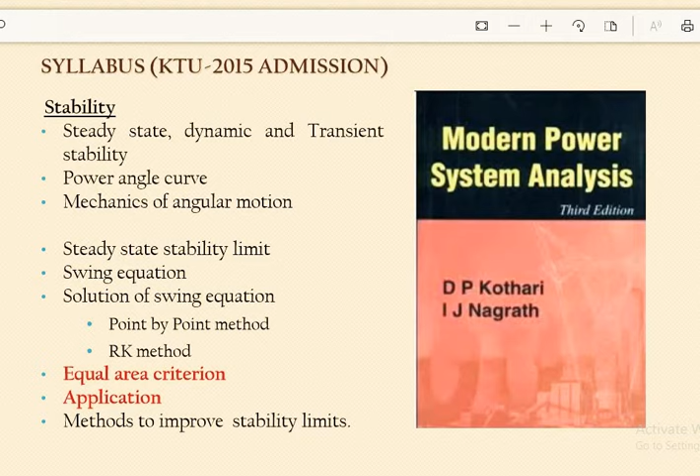Before proceeding to today's topic, let's refresh the concept of transient stability. Do you remember what is transient stability? As the name indicates, transient stability means a sudden and large disturbance occurring to a system. Now, do you remember what do you mean by stability? It is associated with the synchronous speed of the machine, our synchronous machine. Okay, and this was our swing equation. So what do you mean by swing equation? From the name itself, swing means what? Swinging of what? Swinging of rotor.

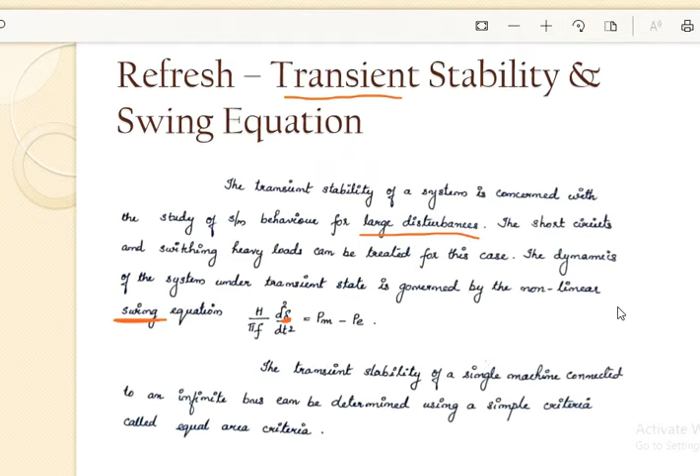Okay, that can be determined by the angle delta. What was the angle delta? Angle delta is the displacement of the rotor with respect to a synchronously rotating reference frame. Okay, so with the help of swing equation, it is actually the swinging of our rotor angle delta or the load angle delta. How is it related to the electrical power generated? Okay, or how the mechanical power and the electrical power's influence is there in this delta or in the reverse way, how this delta influences the electrical power and the mechanical power. Okay, so that is governed by this swing equation. Now, in order to find out the transient stability of a system, we require the swing equation.

Now, equal area criteria is a very important topic, very important topic, which can be asked as an essay question or its application can be asked as an essay question. Anyways, the concept of the equal area criterion should be very clear so that any type of questions in this particular area can be tackled easily.

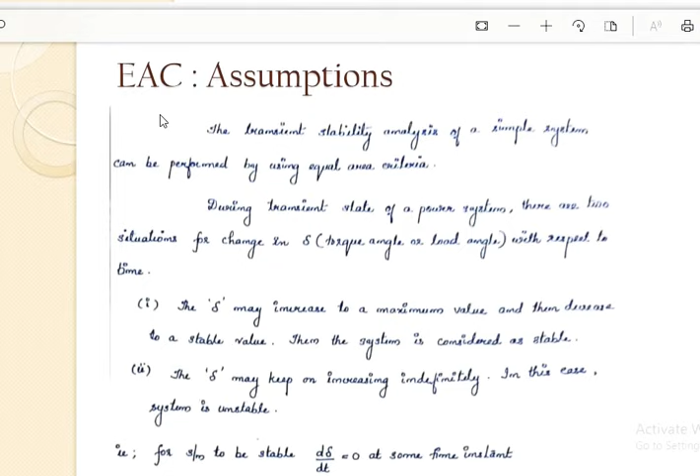Now, there are some assumptions. EAC here actually means equal area criterion. Some assumptions are there before proceeding. So first of all, again reminding you of transient stability: transient stability means if a system is capable of coming back to its initial state after a sudden or large disturbance, then you can say that particular system is transiently stable. Okay, and we will be analyzing whether a particular system is transiently stable or transiently unstable with the help of this criteria, that is equal area criteria. So if a particular system satisfies the equal area criteria, you can say that the system is transiently stable.

So in that case we are putting forward some assumptions here, and that is, again, what is delta? Delta is torque angle or the load angle. Okay, our first assumption is the delta may increase to a maximum value, then decrease to a stable value; we'll say that system is stable. What do you mean by delta? Delta is a deviation or displacement of the rotor with respect to a rotating reference frame, right? So if this delta varies and then decreases to a stable state, we can say our system is stable. The second assumption is when delta is increasing indefinitely. Delta means the displacement from synchronous. Okay, so when delta is increasing indefinitely, that displacement is going on increasing, or your rotor is running away from synchronous speed. That is the meaning. Okay, so in that case you can say that your system is unstable.

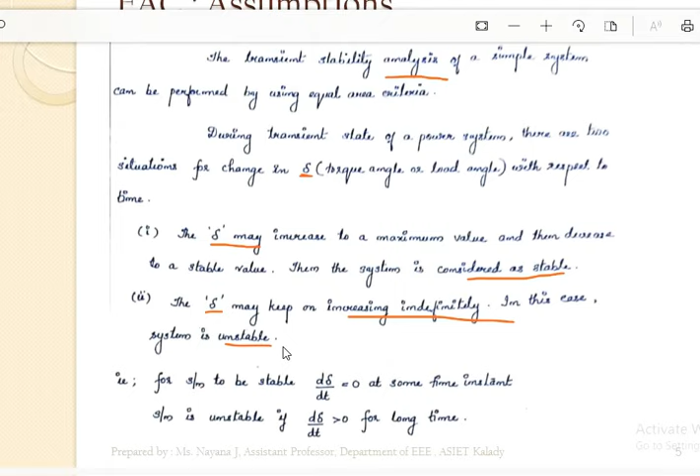These are the two assumptions put forward for equal area criteria. Under this case, I can write: for a system to be stable, your delta should not change, isn't it? So you can say that d delta by dt should be equal to 0. Your delta should be constant, your delta should not vary. Okay, so for a system to be stable, the change in delta with respect to time should be equal to 0, or there is no displacement with respect to time. And it is unstable when the change in delta with respect to time is increasing, or it is positive, greater than 0. If the change in delta is greater than 0, it means delta is continuously increasing. In such case, your system is unstable. These are the two main assumptions required for deriving our equal area criteria.

I hope these two assumptions are clear to you. The first thing is, a system can be stable when there is no change in delta, or d delta by dt is equal to 0. A system is unstable if delta continuously increases, or d delta by dt is greater than 0.

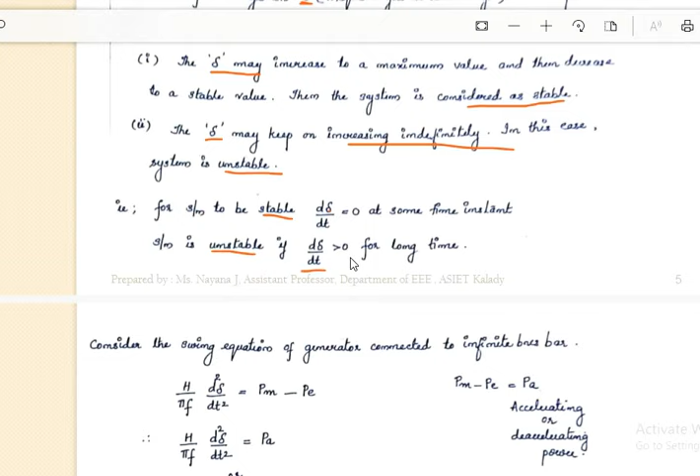Now, with the help of the swing equation, what was our swing equation? H by pi f into d square delta by dt square is equal to Pa, or H by pi f into d square delta by dt square is equal to Pm minus Pe. What is this Pm minus Pe? It is nothing but Pa, the accelerating power or deaccelerating power.

What is Pm? Pm is the mechanical power input. What is Pe? It is the electrical power output of the generator. When mechanical power is greater than electrical power, there will be accelerating power. When electrical power is greater than mechanical power, the power will be deaccelerating. And when mechanical power equals electrical power, we can say the system is stable.

These things we have discussed in the previous lectures, right? So this was our swing equation: H by pi f into d square delta by dt square is equal to Pa, where H is the inertia constant, f is the frequency, delta is the load angle or torque angle, and Pa is the accelerating power, which equals Pm minus Pe.

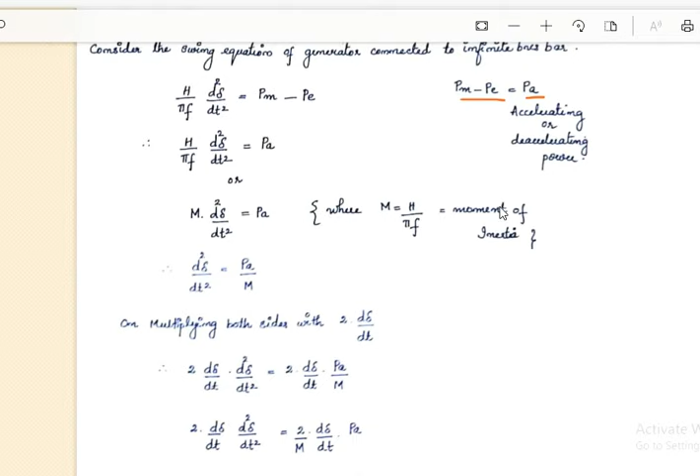Now we can reframe it as m into d square delta by dt square is equal to Pa, where m is the moment of inertia, equal to H by pi f, as we have seen. From this, I can write d square delta by dt square equals Pa over m, moving m to the other side.

Now I am going to multiply both sides by 2 into d delta by dt. So multiplying these two sides, it becomes 2 into d delta by dt into d square delta by dt square is equal to 2 into d delta by dt into Pa by m.

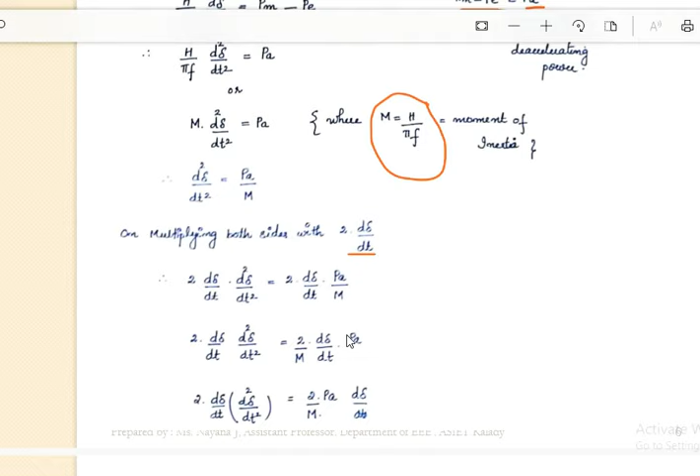Again rearranging this: 2 into d delta by dt into d square delta by dt square is equal to 2 by m into d delta by dt into Pa.

Now what I am going to do is integrate both sides with respect to d delta. So 2 times the integral of d square delta by dt square into d delta is equal to 2 by m Pa d delta. Here the dt would get cancelled, since there was one dt in numerator and one in the denominator, giving us the final expression.

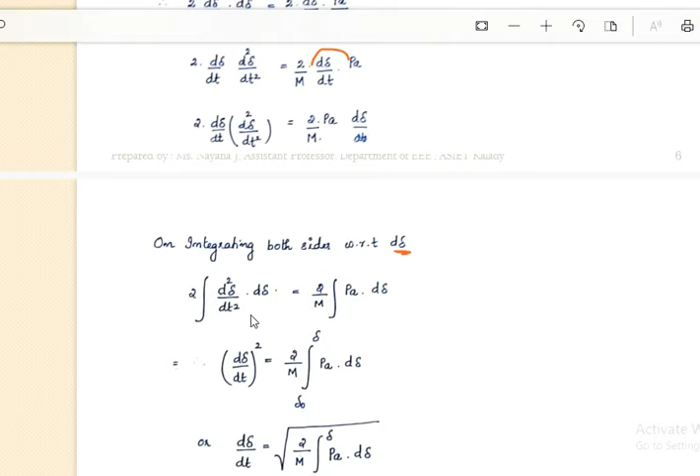So it is now with respect to d delta that we are integrating. What is the integral of d delta by dt the whole square? That is the integral of d square delta by dt square, which equals 2 by m times the integral of Pa d delta.

Now what can be the value of delta? We can apply limits, and the value of delta can range from an initial value delta 0 to a final value delta. So rearranging, d delta by dt the whole square is equal to this, so d delta by dt equals root of 2 by m times the integral from delta 0 to delta of Pa into d delta.

Now for the system to be stable, what should be the condition? d delta by dt should be equal to zero. That means either d delta by dt equals zero, or root of 2 by m times the integral from delta 0 to delta of Pa into d delta should be equal to zero. But can 2 by m be equal to zero? No. So the integral from delta 0 to delta of Pa d delta must be equal to zero.

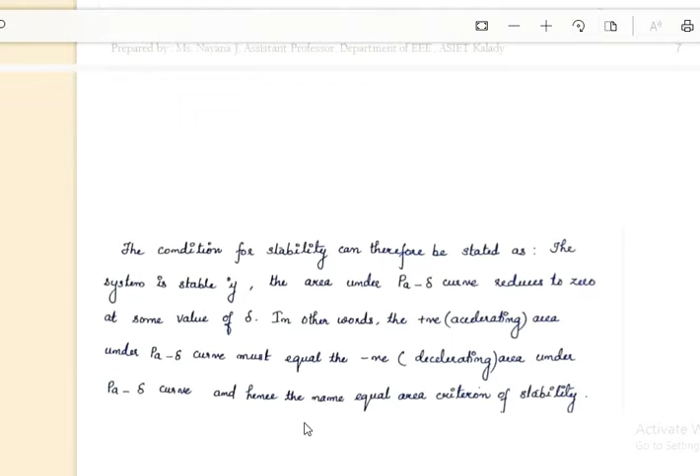Now what is this Pa? Pa means Pm minus Pe, and that quantity's integral equals zero. So from that we can say, what do you mean by the integral of something?

Integral of something means what? It is nothing but area, isn't it? So the area of the accelerating power is equal to 0. That is the meaning. Or I can say that area of mechanical power is equal to area of electrical power.

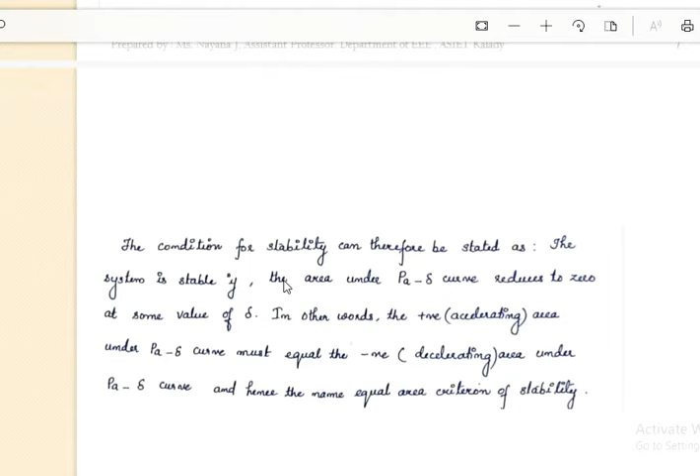So you can state that the condition for stability can now be stated as: the system is stable if the area under the P-delta curve reduces to 0. In other words, the accelerating area under the P-delta curve must be equal to the deaccelerating area under the P-delta curve, and hence the name equal area criteria.

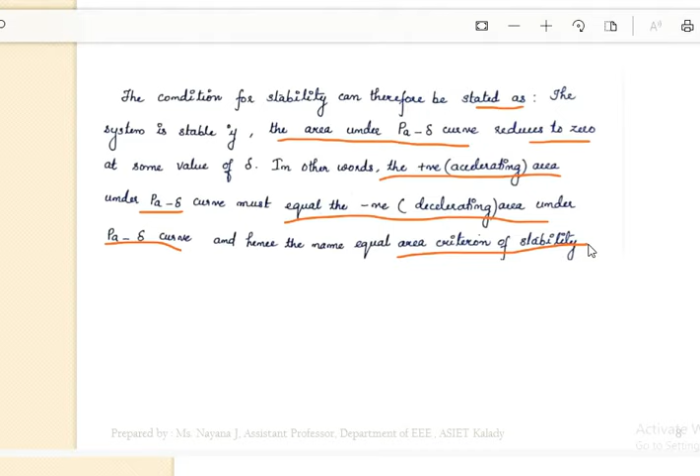So what did we derive actually? We have derived the condition for the system to be stable: d delta by dt should be equal to 0. For d delta by dt to be equal to 0, this is the condition you obtained. What does this condition indicate? Integral of something is equal to 0, that means integral of something means some area. What area? The area of the graph between P and delta.

Do you remember any graph between P and delta? What is this graph? This axis is P and this axis is delta. What is this curve? This curve is actually your power angle curve, right? This is electrical power P. This is our power angle curve.

In this curve, what all areas should be equal to 0? The accelerating area should be equal to 0. So in this curve some areas are there. Let this be one area and let this be another area. And what is this area? This area corresponds to PM. If this area corresponds to PM and if this area corresponds to PE, and if these two areas are equal, you can say that your system is stable.

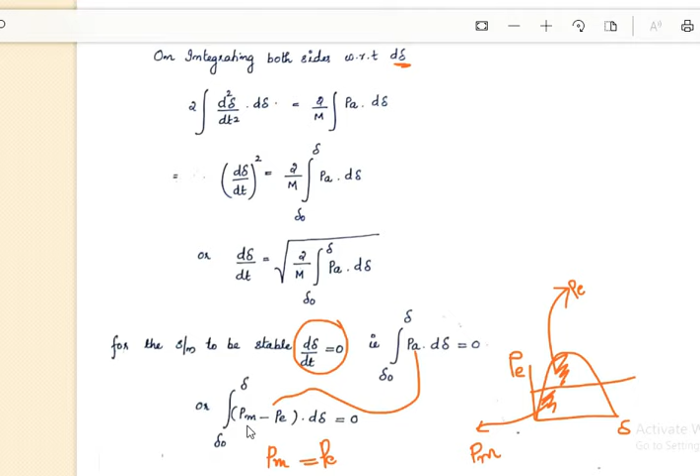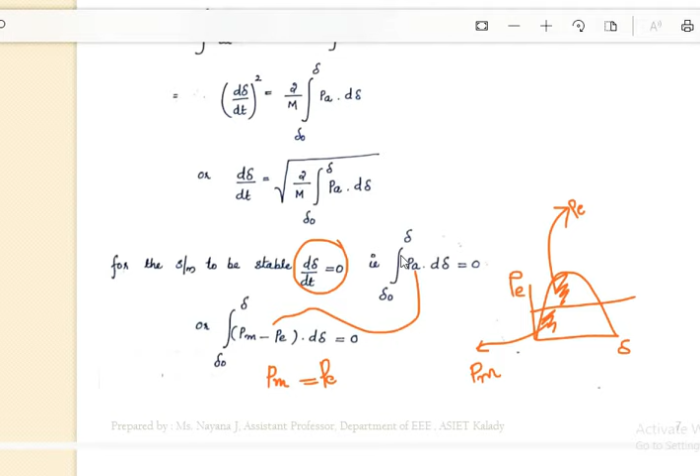What do you mean by PM minus PE is equal to 0? It simply means your PM area is equal to the PE area over the delta curve, isn't it? So this indicates that for a system to be stable, the accelerating power should be equal to the deaccelerating power, or you can say the total net power is equal to 0. If this is attained, you can say that your system is transiently stable.

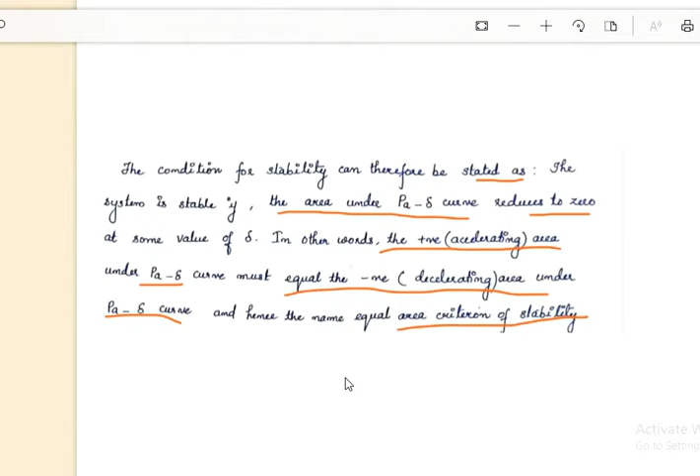Now this idea will be much more clear by looking into the applications, so we'll see which are the two areas and everything like that. So we can say that the condition for stability, by equal area criteria, is that the area under the P-delta curve - remember, the P-delta curve is our power angle curve - should reduce to 0.

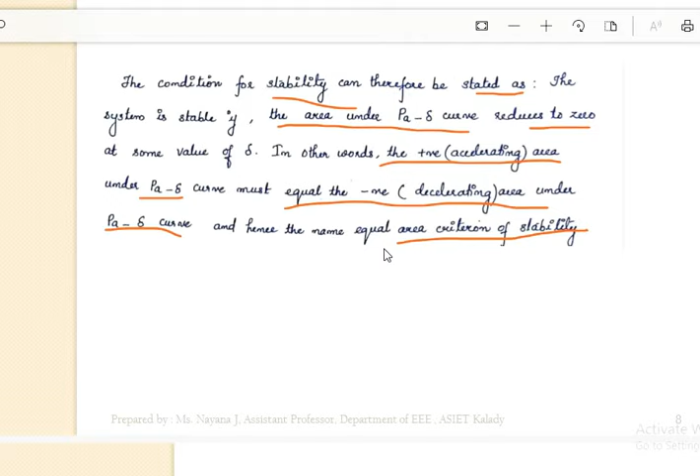Or we can say that the accelerating area of the P-delta curve must be equal to the deaccelerating area of the P-delta curve, and hence we call this criterion by the name equal area criteria. Am I clear? This equal area criteria derivation is very important. Now this concept of equal area criteria will be much more clear to you if we discuss the applications.

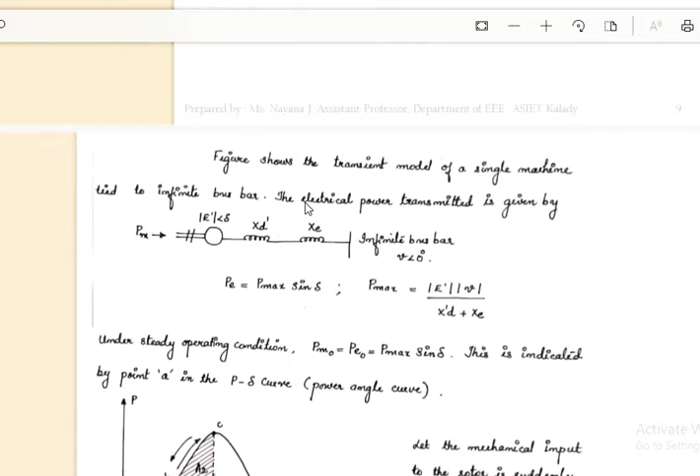Now we will see one application where we consider a sudden change in mechanical input. Now we will see what actually it is. So here consider a system is shown here: this is our generator, this is the transmission line, and this is the receiving end voltage. So if this is the sending end voltage E and the receiving end voltage is V, and the transmission line reactance is XD dash and XE, you can say what is this equation?

P is equal to P max sine delta. This is our power angle equation, right? P is equal to P max sine delta. And what is this P max? P max is nothing but sending end voltage into receiving end voltage divided by total reactance.

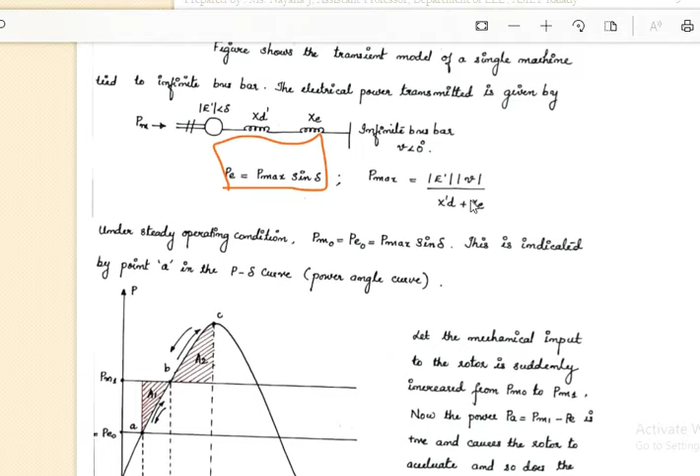Okay, now let's draw the curve. Here, this is the power angle curve, and this is the curve that we have drawn here. Now just concentrate on this curve actually. Now under steady state operating condition, what is the case? Steady state operating condition we have assumed it like, right? For steady state operating condition, your mechanical power should be equal to electrical power.

Let the initial mechanical power be Pm0, which is equal to your electrical power Pe0 if it is a steady state condition. And what is Pe0? It would be equal to P max sine delta, or rather I can say P max sine delta 0, where delta 0 is the initial load angle. So I can say that this is a power angle curve that I have drawn, and here I have written mechanical power. What is the mechanical power? Mechanical power is nothing but our steam input, right? It depends upon the steam input.

If the steam input is constant, the speed of your turbine is also constant, or I can say the mechanical power is also constant. This line indicates the mechanical power, the initial mechanical power. It's a constant value, and under steady state condition, this mechanical power is equal to the electrical power.

Let's see this point A. This was your power angle curve, and this curve represents the electrical power. So the electrical power here is the electrical power under the initial condition, because at this point the mechanical power and electrical power are the same - this common point. The delta corresponding to that is delta 0, our initial load angle. Corresponding to that delta 0, this is the electrical power generated, which equals the mechanical power because it is under stable condition - meaning the machine is rotating at a speed equal to synchronous speed, marked as omega s.

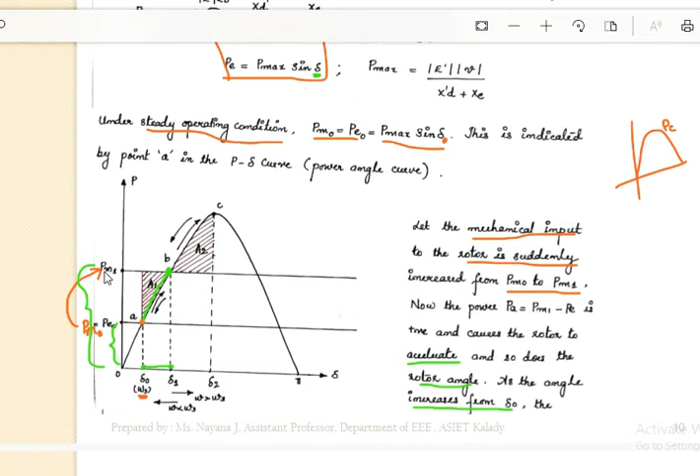At this point, the new electrical power is equal to the mechanical power. Whenever the electrical power becomes equal to the mechanical power, the machine is under stable condition. At delta 1, mechanical power equals electrical power, or the accelerating power is zero, a stable state is reached. So the angle is supposed to be stable here, but what happens? The rotor angle continues to increase, because the rotor was accelerating.

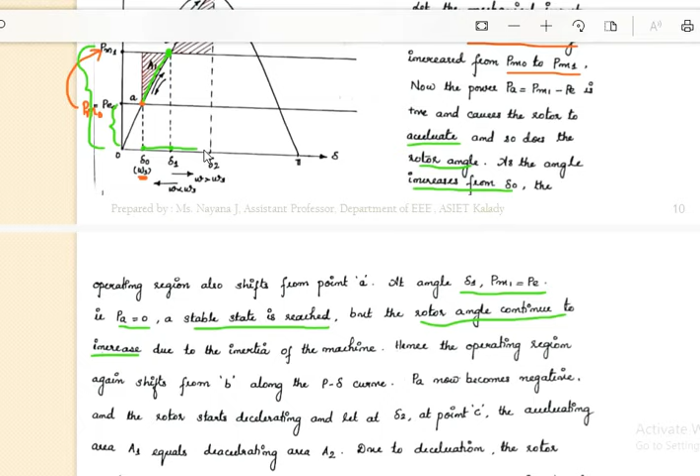Can this machine suddenly stop at this point? No, the rotor angle continued to increase because of the inertia of the machine. The machine wants to stop here, but it will not stop because of inertia, so the rotor angle will continue to increase in this direction. When the rotor angle increases in this direction, what happens to the electrical power? It also again increases like this.

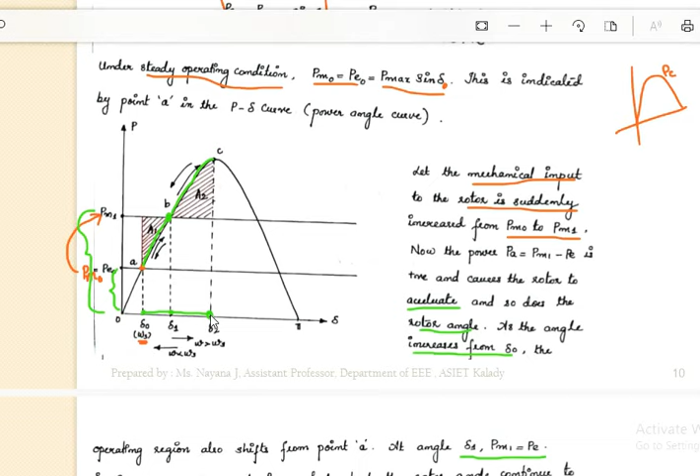Okay, now assume another point, it has reached at another point. Delta 2. Assume another point delta 2 here. At this point, how is your electrical power? I can say this much is your electrical power.

But what is the value of your mechanical power? Mechanical power is constant, right? This much is your mechanical power. So this much was your electrical power and this much is your mechanical power. So what happens? Your mechanical power is less compared to your electrical power.

What will happen to the net power? Net power is negative, right? When the net power is negative, what will happen to your rotor? Rotor will decelerate or deaccelerate, isn't it?

When the rotor deaccelerates, what happens? Load angle also decreases. So load angle reached this point and now the load angle continues to decrease in this direction. When your load angle decreases in this direction, what will happen to your electrical power? Electrical power also decreases in this direction.

Am I clear? In this direction, but again it reached this point. At this point, what happens? Your electrical power and mechanical power are same, but your rotor continues to decelerate.

Why? Because of the inertia. So what happens? The load angle continues to decrease from delta 1 towards this point. Correspondingly, electrical power also continues to decrease like this.

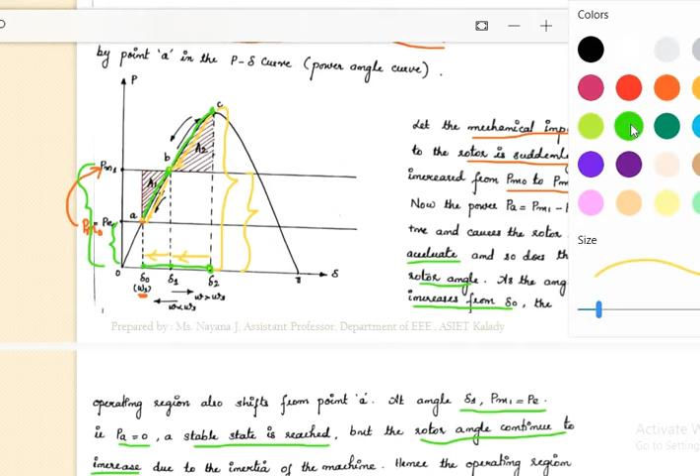Okay, again, once it reaches here, what will happen? This is your electrical power and this was your mechanical power. Your mechanical power is high compared to your electrical power. What will happen now? The machine will accelerate, that means in this direction. When the rotor angle increases in this direction, electrical power also increases in this direction, isn't it?

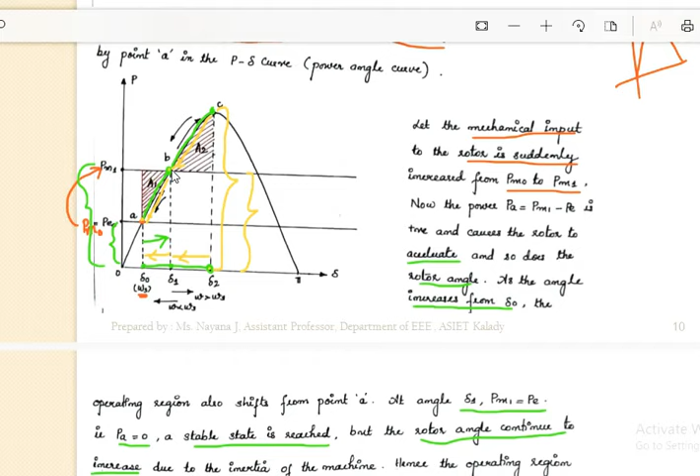So in this way, your machine's operating point will change from A to C. Again it reaches A, C. Finally, after this swinging, the machine will swing between the points A and C, and finally it reaches a steady point B where your electrical power is equal to mechanical power. Am I clear? Is this concept clear to you?

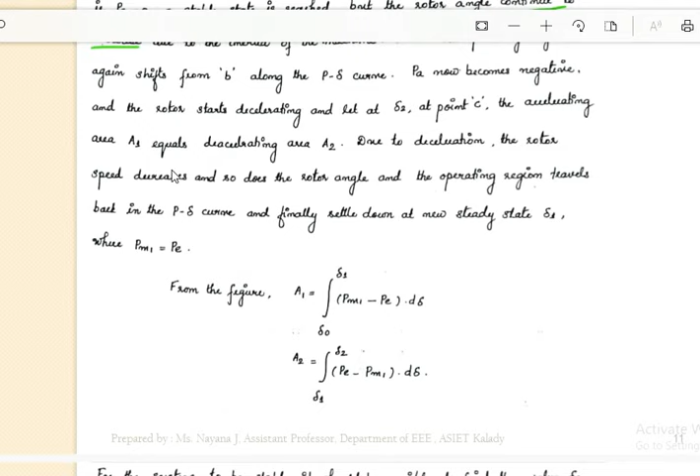So now we are going to apply our equal area criteria here. Okay, from the figure, what is the first area? We are considering the accelerating area and the deaccelerating area. Accelerating area means mechanical power higher compared to the electrical power. Now we will find out what is that area.

Can you see? Mechanical power. Okay, this area, between mechanical power and electrical power. This curve is actually corresponding to electrical power, whereas the straight line corresponds to mechanical power. So what is the area? Area Pm minus Pe, between which all limits? Delta 0 to delta 1. So between delta 0 to delta 1, what is the area? Pm minus Pe. This much, right? This is the first area, the accelerating area.

Now from delta 1 to delta 2, which is higher? Electrical power is higher compared to the mechanical power, isn't it? So from delta 1 to delta 2, which is the area? Pe minus Pm. Okay, because electrical power is higher compared to mechanical power. So this is your second area or deaccelerating area.

But from delta 0 to delta 1, your mechanical power was higher compared to your electrical power. So this is the accelerating area. So you got two areas. A1 is the accelerating area and A2 is the deaccelerating area. Now, according to equal area criteria, for this system to be transiently stable, the two areas, that is accelerating area and the deaccelerating area, should be equal.

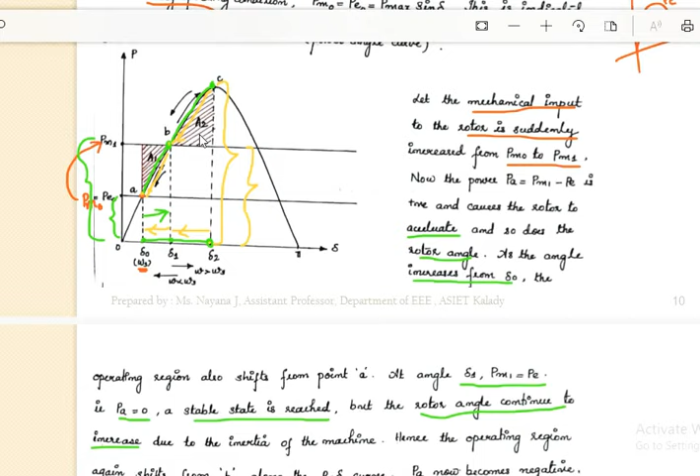Now let's see the analysis. From this figure here, this is what we have discussed. So A1 area, first area is from delta 0 to delta 1, Pm1 minus Pe into d delta. And the second area is from delta 1 to delta 2 where electrical power was greater, right? So Pe minus Pm1 into d delta.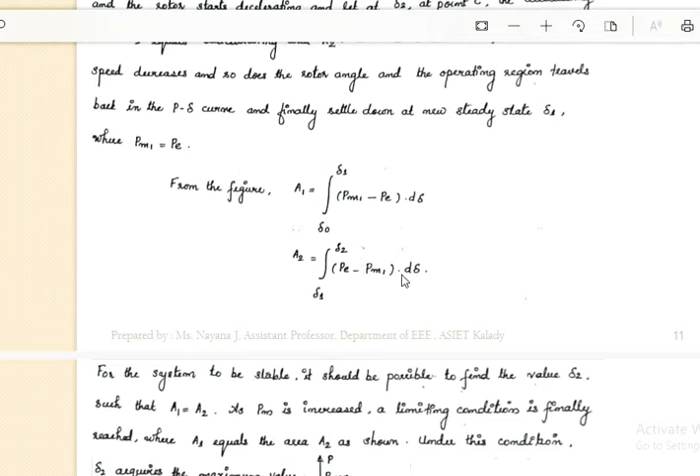For the system to be stable, what should be the condition? For the system to be stable, the two areas should be equal. Okay, or at least your A2 should be greater than A1. This is a condition.

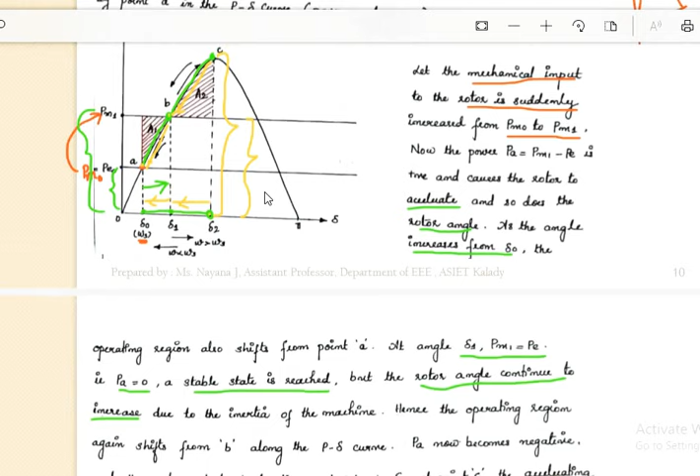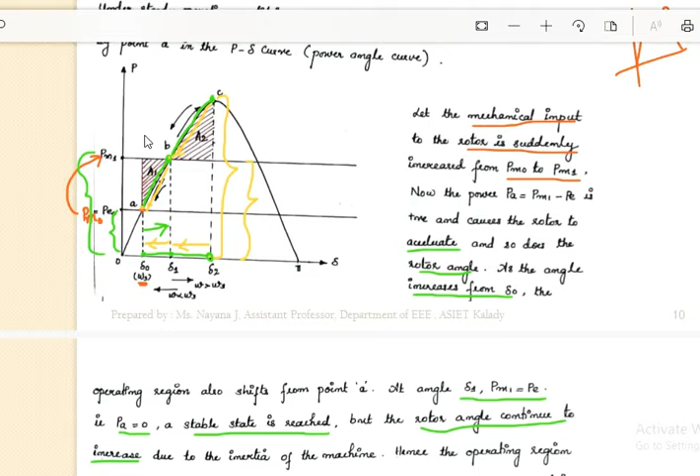Okay, A1 is equal to A2. Now let's see this, assuming that your A1 is equal to A2, no issue. The main case is that your accelerating area should be less than your deaccelerating area. Whenever your accelerating area becomes greater than the deaccelerating area, the machine loses its synchronism.

Now here we are assuming another case. Pm is further increased. This is one case, another case, right? As Pm is increased, this is the maximum value of delta 2. Beyond which I cannot have any delta, isn't it? This is delta 1, this is delta 2.

Now this is a condition. Under this condition, delta 2 is a maximum value. This is a maximum value. If further I cannot increase the delta so as to make these two areas equal. Okay, so that's the case here.

Now if there's any further increase in P, if I increase the mechanical power like this much, this is your new mechanical power. So that means your area would be somewhat this much, right? This much would have been your first area.

And your second area would be only this much. So from here itself you can see that this area becomes greater than this area. So your system will become unstable. So that means this will be your delta 2. Right? So beyond which I cannot increase.

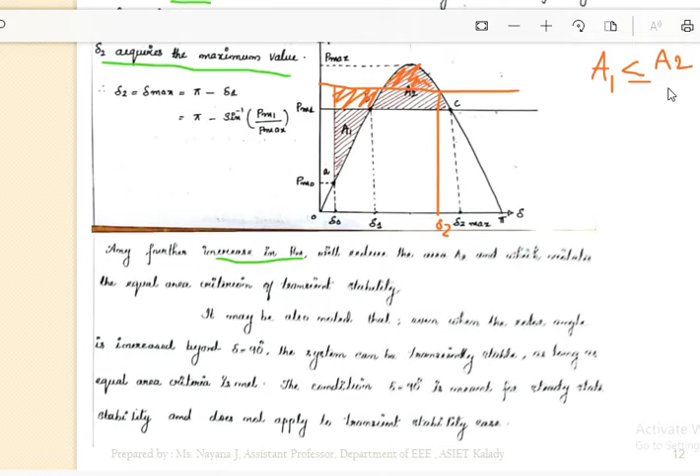That is the maximum limiting condition. Or at least your accelerating area should be always less than or equal to your deaccelerating area. This is the condition. So by keeping this criterion, you can say that a system can be transiently stable. So coming back to this particular case, here you can say that this is a maximum value of delta because there is no value of delta available here.

There is no value of delta available here. So this is the maximum possible value of angle delta. So you can say that your delta 2, or the maximum value of delta, is equal to pi minus delta 1. It is same as pi minus delta 1, right?

So what is this much angle? This much angle will be equal to the entire thing pi minus this. This is simply but delta 1. So pi minus delta 1. So what is this delta 1 actually? What is this delta 1? What is this delta 1?

That is nothing but PM1, right? PM1 is equal to Pmax sine delta 1, isn't it? That is the equation. PM1 is equal to Pmax sine delta 1. From this I can write delta 1 is equal to sine inverse of PM1 by Pmax.

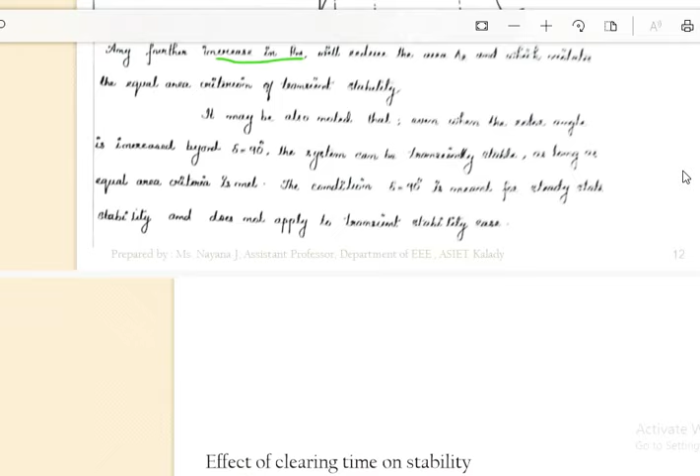Okay, so in this way you can find out the maximum value of delta. So the main application of this equal area criteria is to find out two areas, that is accelerating and deaccelerating area, and whenever you see that your accelerating area is less than or equal to your deaccelerating area, your system is transiently stable. So that was the case when you increase the mechanical power.

Now we will see another case. Here again we consider the sending end voltage and everything are the same. The same assumption is there: initial condition mechanical power is equal to Pm and initial electrical power let it be Pe0. The angle corresponding to that is delta 0. So this is our power angle curve and this is our mechanical power.

So you can say that initially your machine is operating at this operating point A, and corresponding to that your load angle or torque angle is delta 0. So harmlessly your machine was operating under the stable condition, or otherwise I can say at synchronous speed. So suddenly what happens is that a three-phase fault occurs. It was at this point a three-phase fault occurs, and what happened when a fault occurs like this, electrical power from the machine here, the electrical power becomes equal to 0.

So when electrical power reaches 0, what happens? This was the actual electrical power. Now when the electrical power reaches 0, that means from this point your electrical power decreased and reaches 0.

Okay, so this was the first operating condition. Suddenly a fault occurs, your electrical power drops from Pe to 0. That means this operating region. So now what happens? Now your electrical power is 0, whereas this much is your mechanical power.

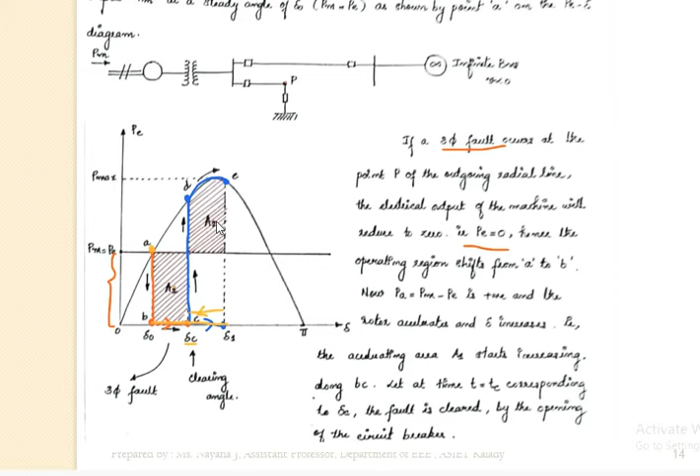Your machine is accelerating, that is Pe, this is Pe and this is Pm. So area between Pe and Pm. Okay, these two areas - if these two areas are equal, or at least the first area is less than the second area, you can say that your system is transiently stable.

Now in this context, what can you say? Can you judge what will happen? Fault is not cleared at this point. Instead your fault is cleared at some point like this. So what will happen to your first area? Now this much will be your first area, isn't it? This much will be your first area and only this much will be your second area, right?

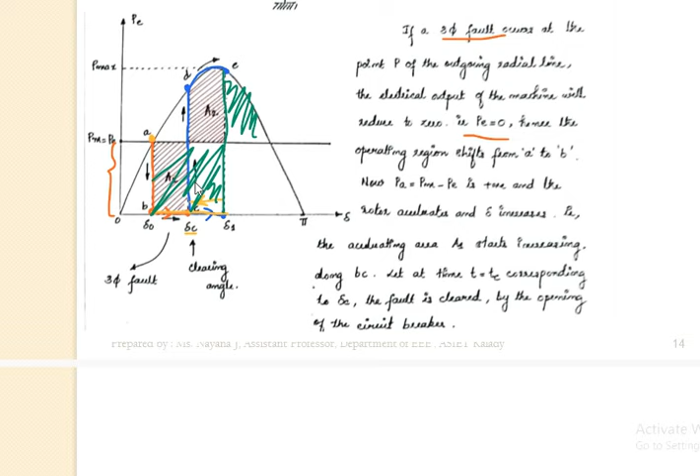So you can say that if the fault is cleared only at this particular angle, your accelerating area is greater than decelerating area. So what happens when accelerating area becomes greater than decelerating area? The system will not be stable. The system will lose its synchronism.

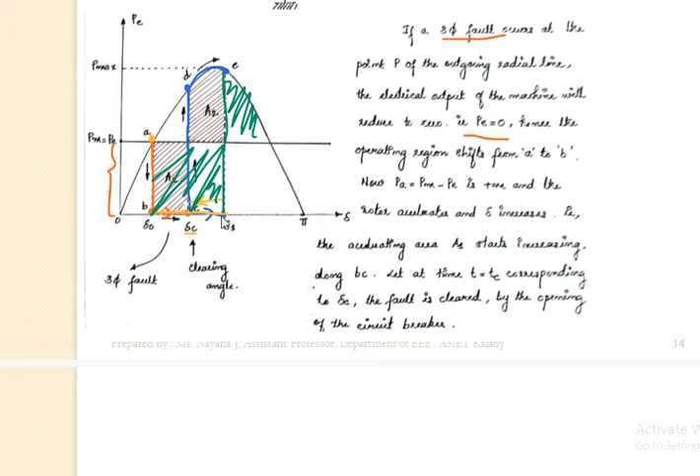So in this case, I can say that there is a particular angle beyond which, if you delay the fault clearing, these two areas cannot be equal, isn't it? So we are going to find out what is that particular angle, or that critical angle, within which the fault has to be cleared, unless otherwise your machine will move out of synchronism or lose its synchronism. Now let's see what that concept is.

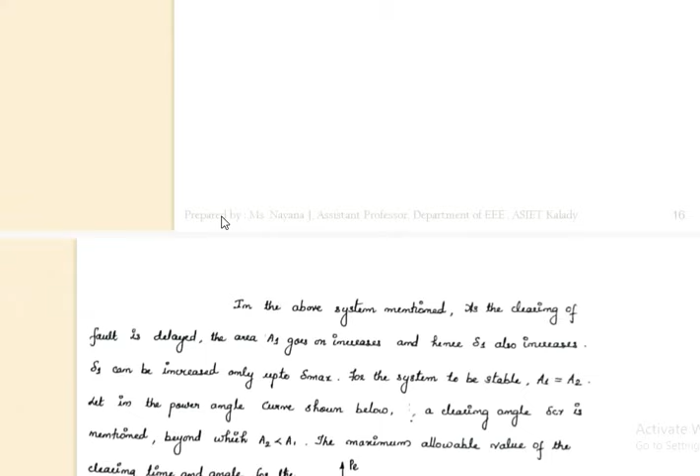The very same system - in the previous system we have cleared the fault at this point, isn't it? Okay, now just leave it. If we have not cleared the fault at that particular point and we have cleared the fault at another point, that a particular point at which your two areas are equal.

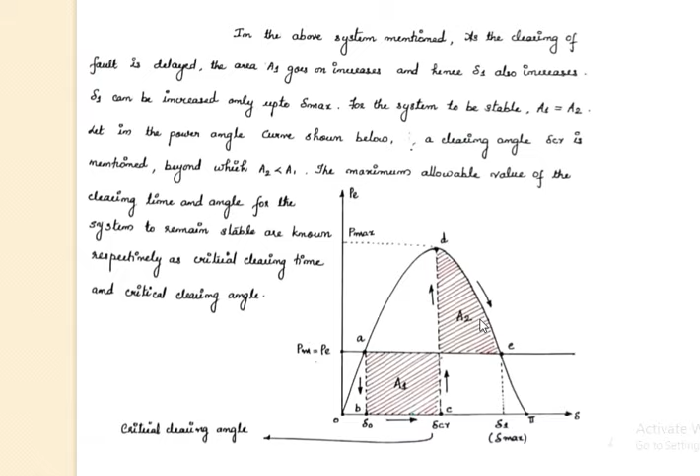So in the first case you can say that the first area was less. Okay, this was the first case. If I am increasing this area, A2 also can be increased in order to compensate with A1, so as to make these two areas equal.

Now in this case, if I have delayed the fault clearing and this is a new point at which I have cleared the fault, for the system to be stable, both areas should be equal.

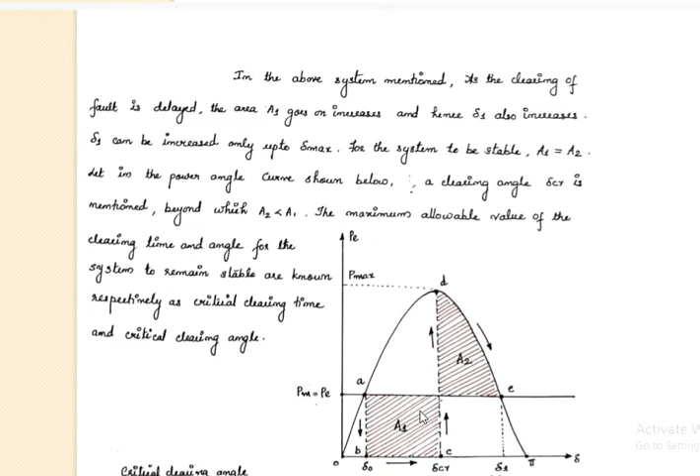Now let's see how I can say both areas should be equal. What is this first area? First area is integral delta 0 to delta CR - we will call this angle the critical clearing angle. So integral delta 0 to delta CR of PM minus PE should be equal to the second area. What is the second area? Integral delta CR to delta 1 of PE minus PM.

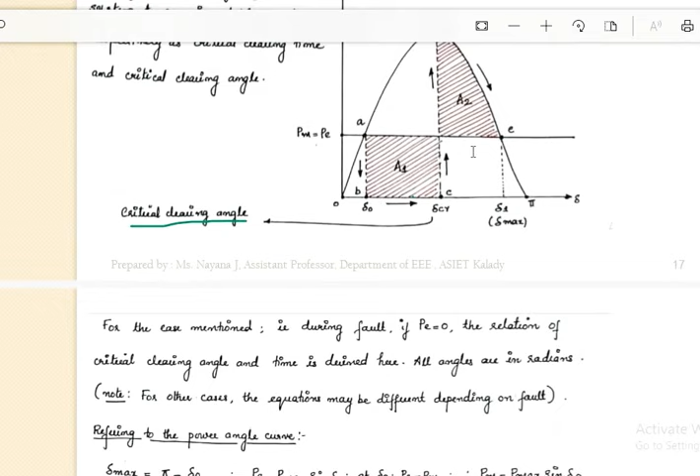Now let's see what is this delta 0, and what is this delta 1. That all things we have seen, right? Your delta 1, or your maximum value of delta - can you increase your delta further here? No, if you are increasing further there is no curve for that, isn't it? You cannot increase it. Now what will happen?

Now let's see what is this delta max. Delta max is same as pi minus this much angle, that much angle means same as this much angle. So pi minus this much. What is this much? Delta 0. So what is delta 0?

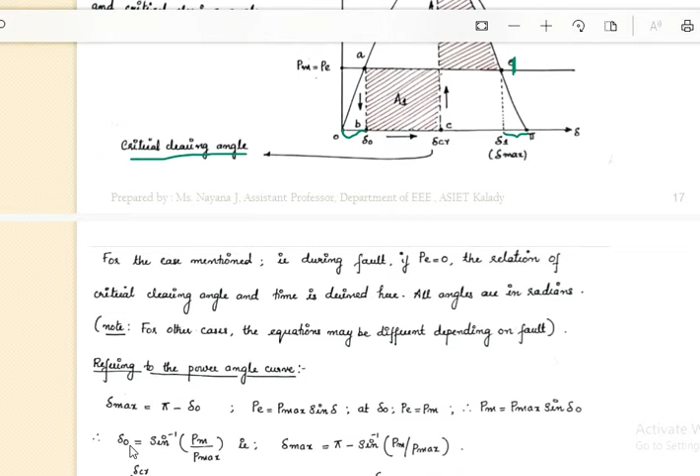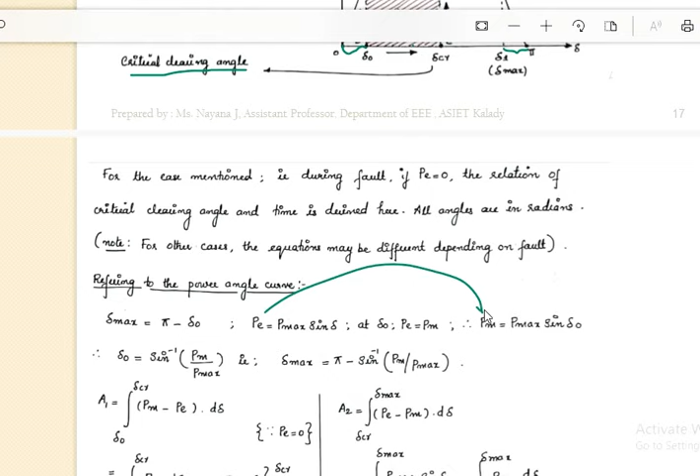We have seen sine inverse Pm by P max. Now what is the PE equation? P max sine delta. Now at delta 0 you can say that PE is equal to PM, or I can write instead of PE, I can write PM. PM is equal to P max sine delta 0. Now, I can say that delta max is equal to pi minus sine inverse Pm by P max.

Now we are finding out the two areas. What was the first area? Delta 0 to delta CR, Pm minus PE. But here PE was equal to 0. I can write delta 0 to delta CR, Pm d delta, that is equal to Pm delta within the limit. So this is the first area.

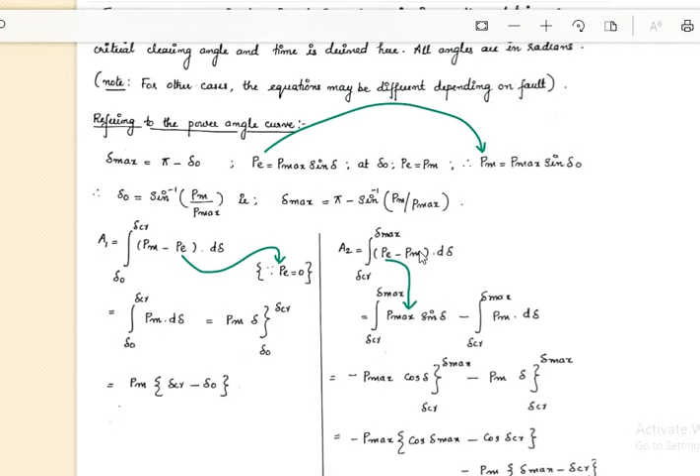Second area is from delta CR to delta max, PE minus Pm, or delta CR to delta max, P max sine delta minus, instead of PE I can write P max sine delta, and instead of PM we wrote PM itself. So after expanding, this was the equation we got. Now these are the two areas we got.

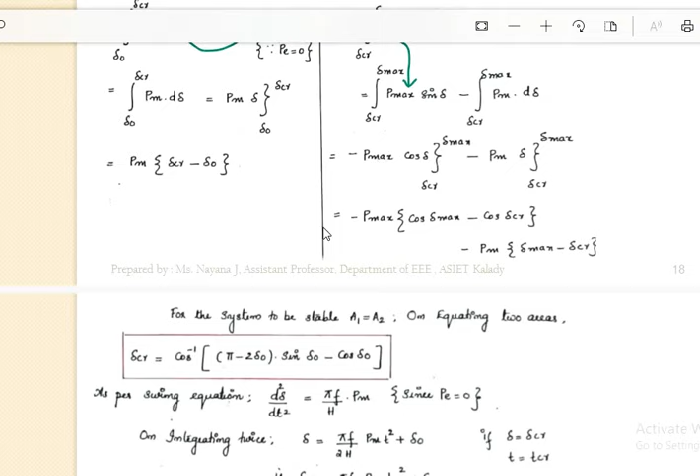Now for the system to be stable, what is the condition? A1 should be equal to A2. So from this I can equate these two areas, and from that equation we have derived what delta CR is equal to. We got cos inverse pi minus something like this. Now this delta is called the critical clearing angle, or delta CR.

Now we know that as per the swing equation, H by pi f into d square delta by dt square is equal to Pm minus Pe. But here Pe is equal to 0, so I can write it as H by pi f into Pm. From this we get d square delta by dt square is equal to pi f by H into Pm.

Now on both sides if I am integrating, I will be getting delta. If I am integrating once, I will get d delta by dt is equal to something. Similarly, if I am integrating two times, I can write delta is equal to pi f by 2H Pm t square plus delta 0, where delta 0 is an initial value or constant. Now, if this delta is equal to the critical clearing angle delta CR, I can write this T or time is equal to critical clearing time.

So from this equation, I can write critical clearing time is equal to root of 2h into this thing. What is h? Inertia constant. What is Pm? Mechanical power.

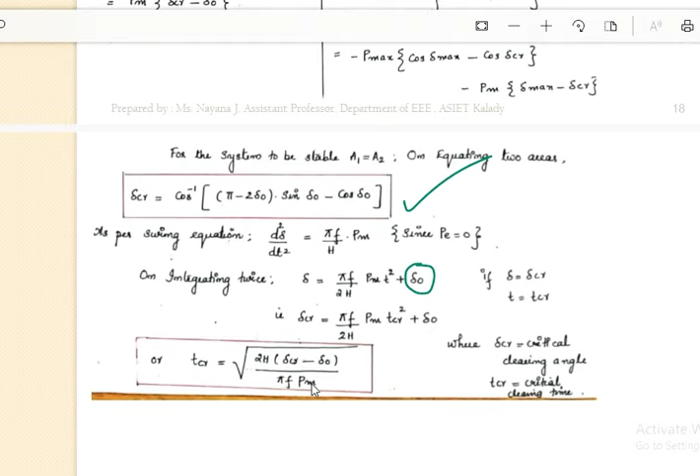Now what does this angle actually indicate? What do you mean by this critical clearing angle? So this angle is called critical clearing angle.

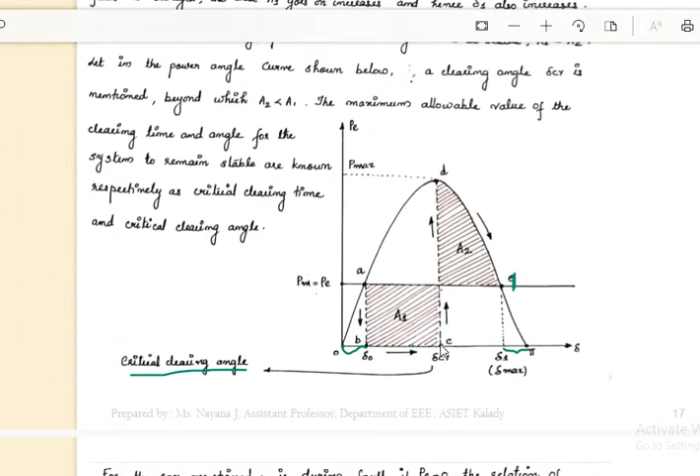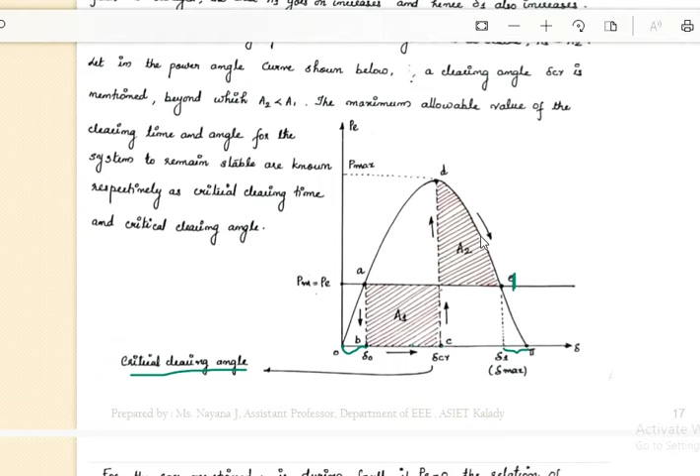Critical clearing angle can be defined as that angle beyond which the fault has to be cleared, or fault has to be cleared below this angle, because beyond the critical clearing angle, if the fault is cleared, your area A1 and area A2 will not be equal, and area A1 will be greater than A2, and your system will move out of synchronism or will be transiently unstable.

So that maximum value of angle beyond which your system loses its synchronism is called critical clearing angle. That means if any fault occurs to a system, that fault has to be cleared within this critical clearing angle. If your critical clearing angle is 90 degrees, your fault has to be cleared before your load angle reaches 90 degrees. Am I clear?

What will happen when your load angle becomes greater than 90 degrees? When it becomes greater than 90 degrees, these two areas will not be equal, and your accelerating area will be greater than your decelerating area, and the system will move out of synchronism, or we can say the system will be transiently unstable. Now the time corresponding to that angle is called critical clearing time.

The fault has to be cleared within that critical clearing time. If the fault clearing goes beyond the critical clearing time, the machine will lose synchronism and move out of stability. We will call that system transiently unstable.

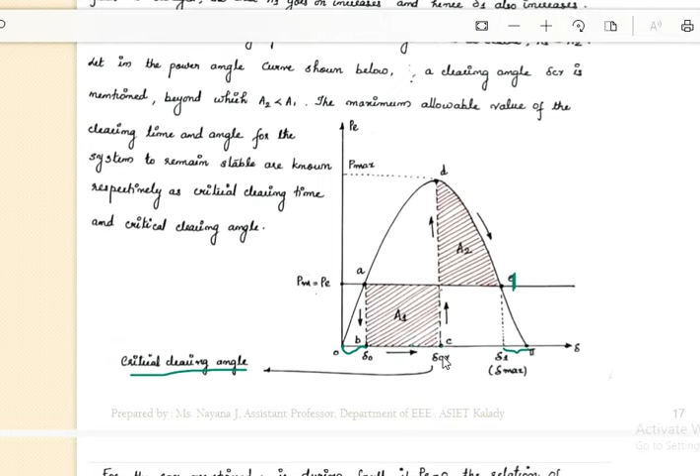So this is another application of equal-area criteria, because with the help of equal-area criteria here we have calculated the critical clearing angle of a system or the critical clearing time of a system, which is very crucial in fault calculations and everything like that. So whenever a fault occurs, the critical clearing angle or critical clearing time plays a crucial role in the stability of power system.

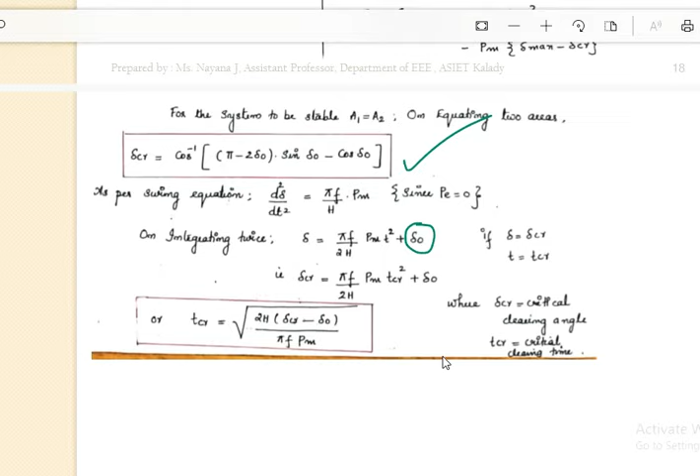This can be asked as a short answer question: what is critical clearing angle and what is its significance on power system stability? What is critical clearing angle? It is the angle below which the fault has to be cleared. What is its significance in stability? Because if fault clearing is delayed and the load angle is greater than the critical clearing angle, the accelerating area becomes greater than the decelerating area, and it will violate equal-area criteria, and the system will be transiently unstable. That is the significance of critical clearing angle on power system stability.

In this context I can say that the most important derivation here is equal-area criteria, and equal-area criteria is actually for analyzing the transient stability of a system. Remember, transient stability of a system, not steady state stability. What is transient stability?

Transient stability means whenever a sudden or large disturbance occurs to a system, whether the system is capable of returning back to its initial state or not - that is actually transient stability. And that transient stability of a system can be analyzed with the help of the criterion called equal-area criteria.

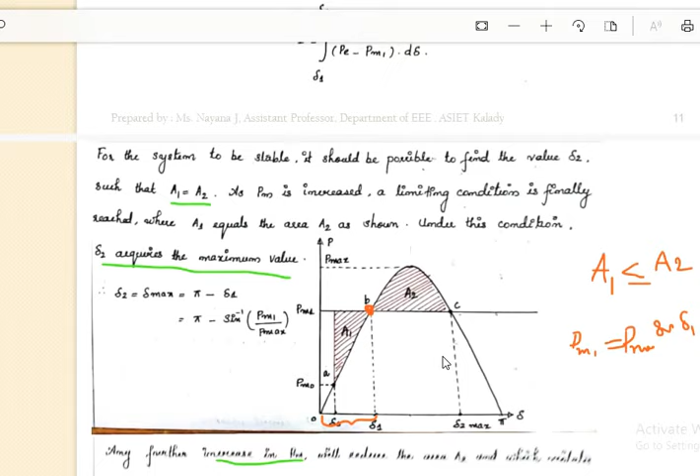What is equal-area criteria? As long as the accelerating and decelerating areas of a system are equal, your system will be transiently stable. Otherwise, whenever your accelerating area becomes greater than the decelerating area, the system will be unstable.

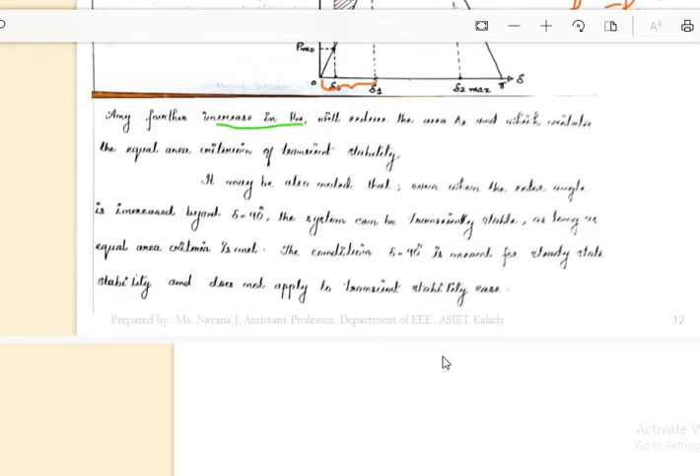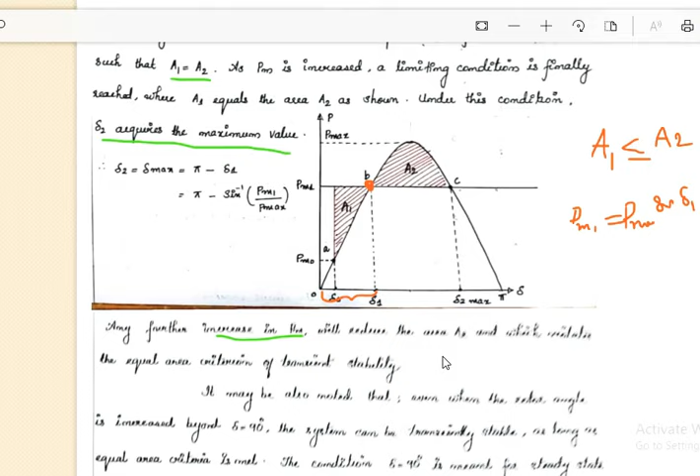By keeping that in mind, we have seen fault clearing and what will happen when mechanical power input is varied - the effect of mechanical power input variation on stability can also be explained with the help of equal-area criteria. This can be asked as an essay question: equal-area criteria, and critical clearing angle or critical clearing time can be asked as a short answer question.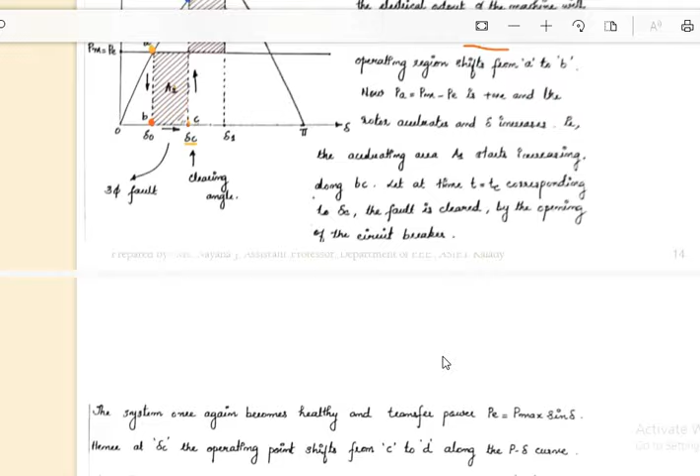So far we have discussed the different types of stability, transient stability, and the method of analyzing transient stability, which is equal-area criteria, critical clearing angle, critical clearing time - and that equation is also very important, how to calculate that critical clearing angle and critical clearing time.